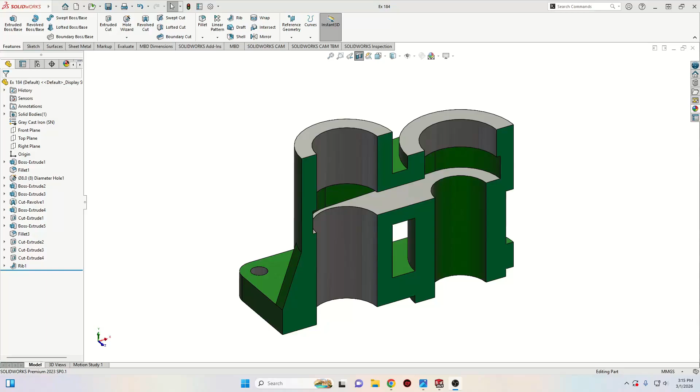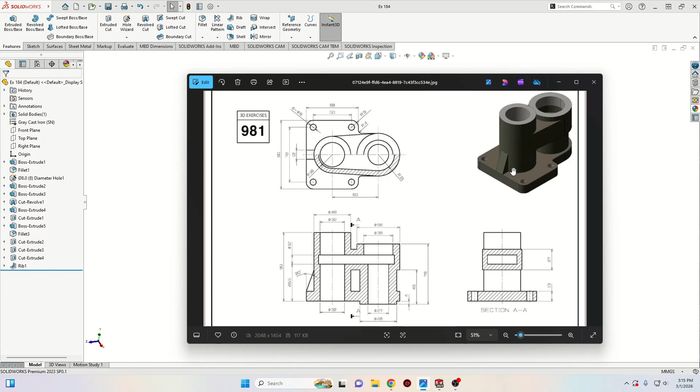This is how it's going to look at the end, and we'll be following the next drawing. We have here all the dimensions. We're gonna start with this base, then we're gonna make these two cylinders, and then the rest of the things. So let's go ahead and start this.

First, let's open a new SolidWorks document, select here part and press OK. Now let's make this plane white. Now we'll start with a sketch in the top plane.

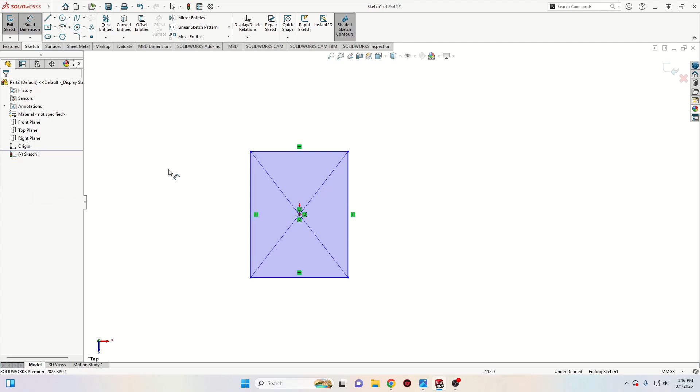And here we'll start with the center rectangle. Let's make it like this. Now let's give some dimensions with smart dimension. First, this line here will have 90 millimeters. And this one here will have 68.

Alright, now let's select center point arc and let's make one somewhere around here. Then select line and let's make a line like this, and then another one like this. Make these points tangent.

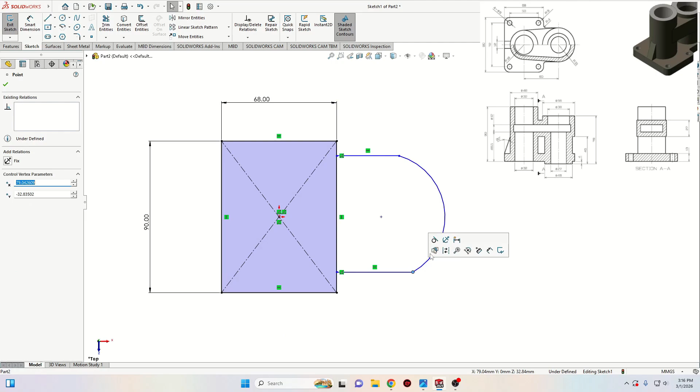Select this center point with this point and select here, make horizontal. Now with smart dimension, let's give a radius for this, and the radius will be 28. And now from this point to this one here will be 60. Alright, now this should be it.

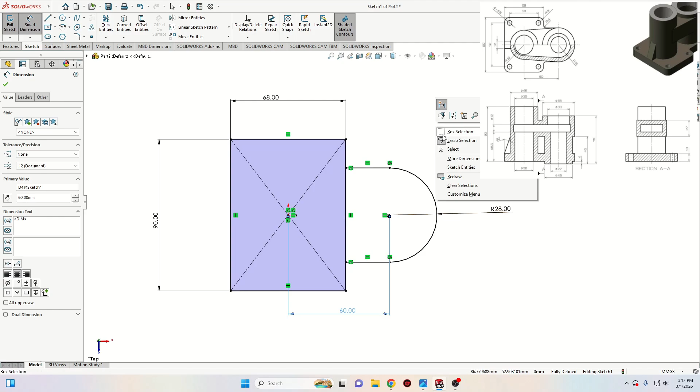Now go to features and use extruded boss base command. Here we'll select these two contours to extrude, and here we'll select blind. Now here the depth for this will be 13 millimeters. Press OK.

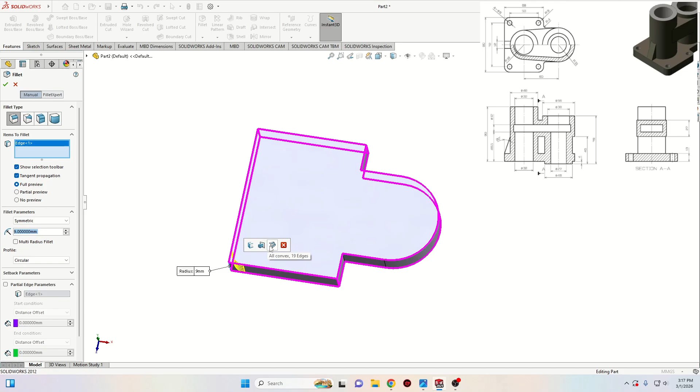And now let's select fillet. The radius will be 9 millimeters. Select this edge and then select these four edges, this other three. Alright, now let's press OK.

Now let's select fillet again. This time the radius will be 4 millimeters, and it will be this one with this one. Press OK.

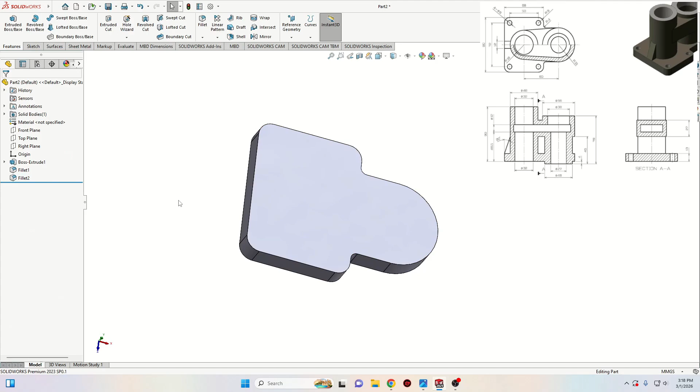Nice, and now let's select hole wizard. Select here hole. Here we're gonna keep this, and here drill size, the size will be 8 millimeters. End condition up to next.

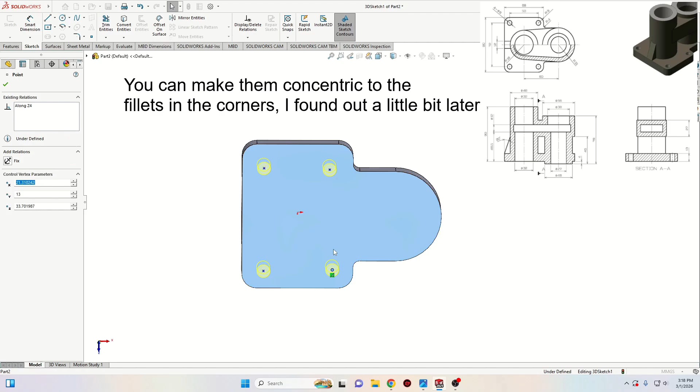And now go to positions, select 3D sketch, and let's place 4 of them. Now select these two and select here make along Z axis. Do the same for these two along Z axis. And then these two along X axis, and do the same for this other two.

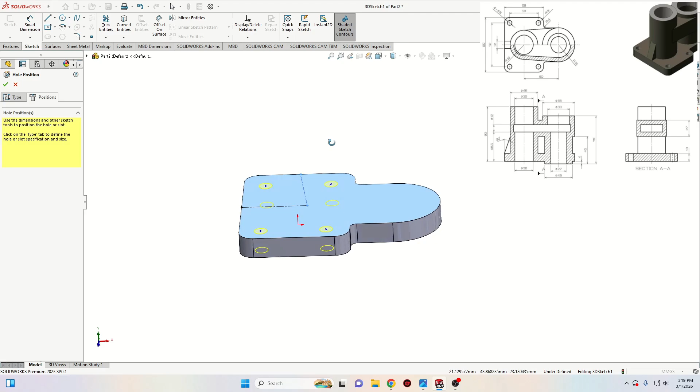Right, now let's select center line and let's make one center line starting from the middle of this edge, going like this on this face, and then going to the center of this other edge. Make sure that they are both these center lines on this face. Now select this point and select here make perpendicular. Alright, now these two center lines will help us to fully define these 4 holes.

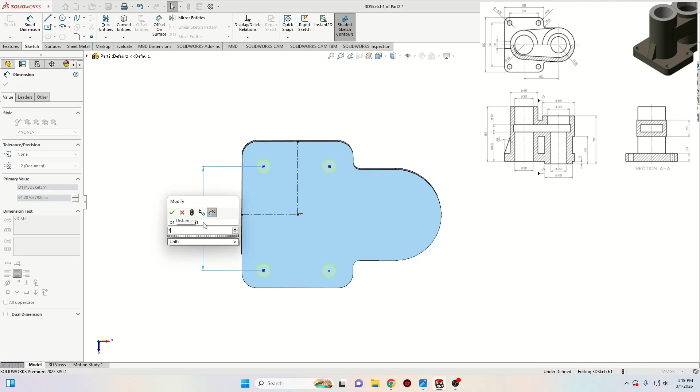Now select smart dimension and let's give some dimensions here. First, between these two will be 72 millimeters. And between these two will be 50. Now from this one to this center line.

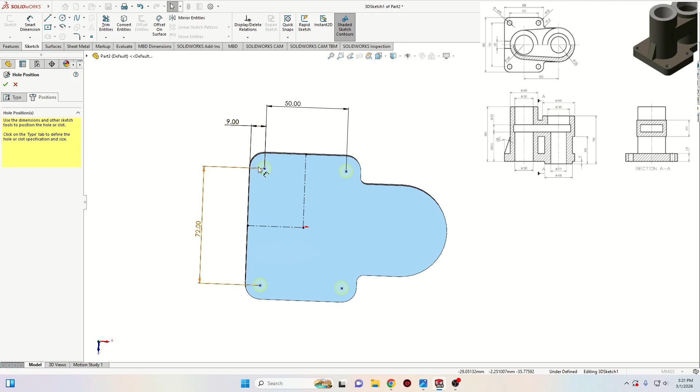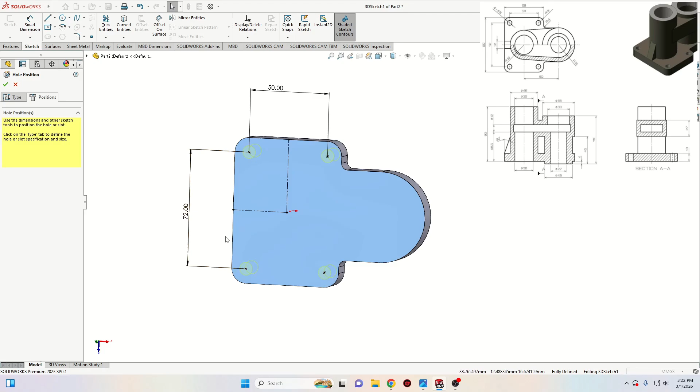concentric to this arc, and it will be way faster. And here should be 72, which will also be 9. Let's just select this and select here make concentric. Alright, and this is faster. Yeah, for some reason it didn't want to work with the center lines, and I didn't see that this is concentric. Anyway, let's go ahead and press here OK.

Now we have the holes. Alright, now let's make the first cylinder. To do that, first let's select this face and open a new sketch. Here select circle and let's make one like this. This one will have the diameter 48.

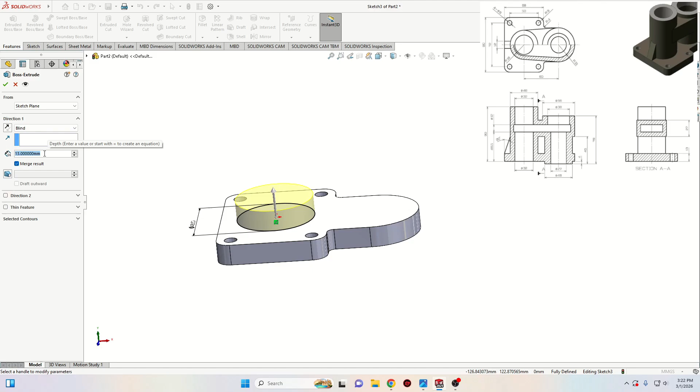Now go to features, use extruded boss base command. And here will be 77 millimeters. Press OK. And now select this face again.

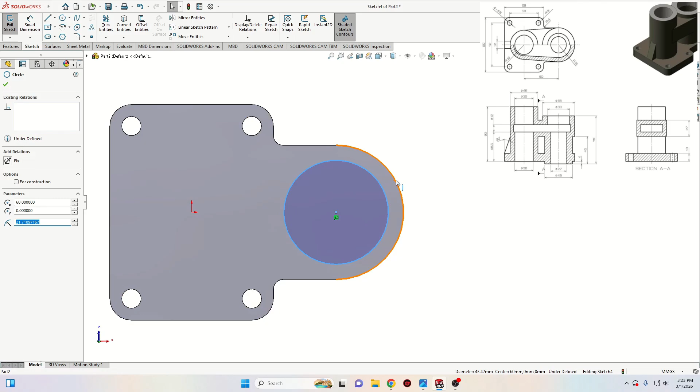Let's open a new sketch. Actually, let's select this other face. Alright, here let's make a new circle. Make it concentric to this arc, so make it in this center point. And then this circle, select the circle with the arc and select here make coradial.

Now go to features, use extruded boss base command. The first direction will have the depth 4 millimeters. And then for the second direction will be 75. Press OK.

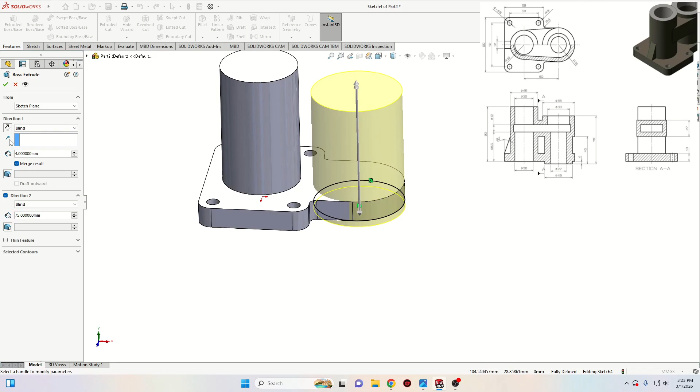Alright, now let's select front plane and let's open a sketch. Here let's select corner rectangle. Let's make one like this. And then another one like this.

Now select center line and let's make a vertical one. Now select these two lines and select here make collinear. Select this one with this one and select here make collinear. Now do the same for this one with this edge, make collinear. Alright, now actually let's do the same for this one too.

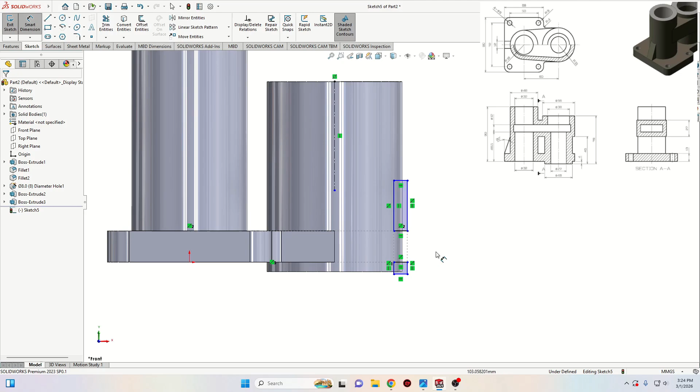Now with smart dimension, let's give some dimensions from this center line to this line here. Here the diameter will be 48. Now from this line to this edge here, actually to this edge, it will be 45.

Now let's make it here 6. And let's make it here 5. Now go to features and use revolved cut. This should be the preview, and now press OK.

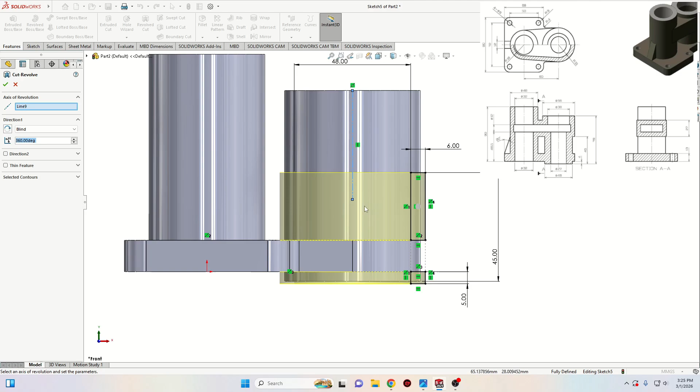Alright, now let's go ahead and open a sketch on this face. Select this face right here, open a sketch.

Now let's go to display style and select hidden lines visible from here. We need to see this edge here. Now select this edge with this one and select convert entities command, and now we have two circles into our sketch.

Now select line and make a line like this, then select line again and make another one like this. Now select this line with this circle and select make tangent. Here we already see that it's tangent.

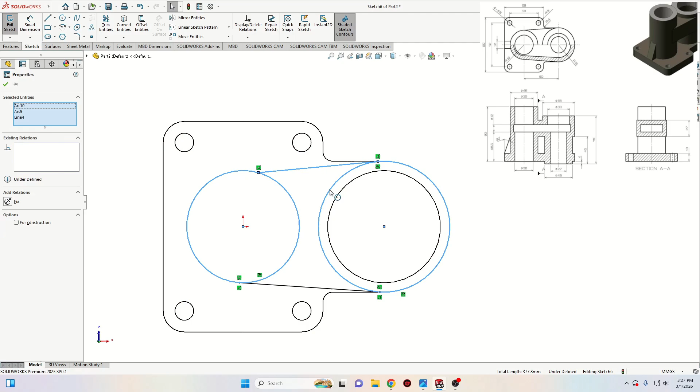Now do the same for this one, the line and the circle, make tangent. Do the same on this other side, make tangent. Alright, now with trim entities command, let's cut these extra parts of the circles. Press OK, and now we should have a sketch like this.

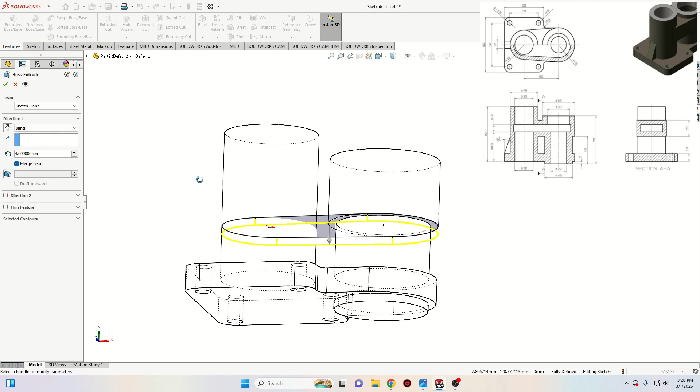Now go to features and use extruded boss base command. We can see that the extrusion is going down, but we want it to go up. Let's reverse the direction, and the depth for this will be 27 millimeters. Let's press OK.

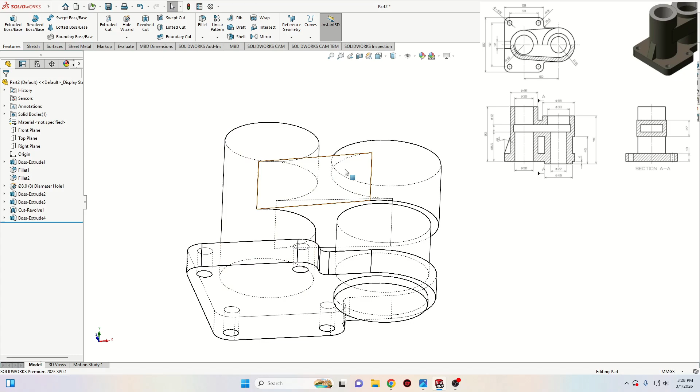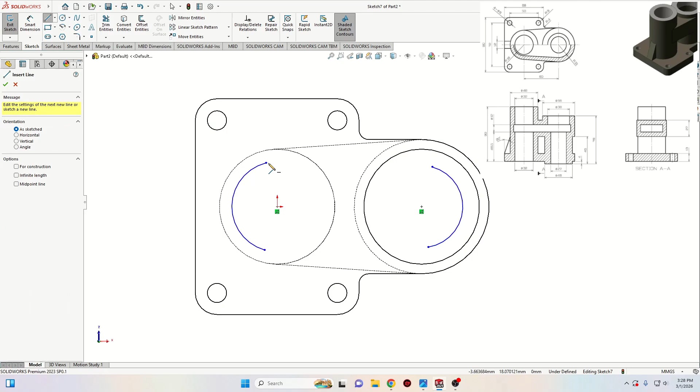Now we'll have to make a cut inside this last boss extruded that we just made. So we'll open a new sketch on this face. Let's select center point arc, and make one arc like this, then another one at this center point like this. Then select line and close this sketch just like this.

Now select this point, select make tangent, do the same for this one, and for these other two, make them all tangent. Now with smart dimension, let's give some radius to these arcs - this one will have 21 millimeters radius, and this one will have 18.

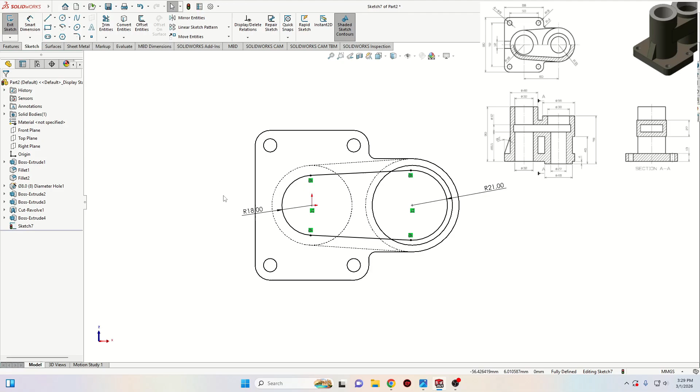Now let's go to features, use extruded cut, and we want this cut to be in the middle of the last boss extruded. To do that, instead of sketch plane, we'll select offset. The offset will be 7.5 millimeters.

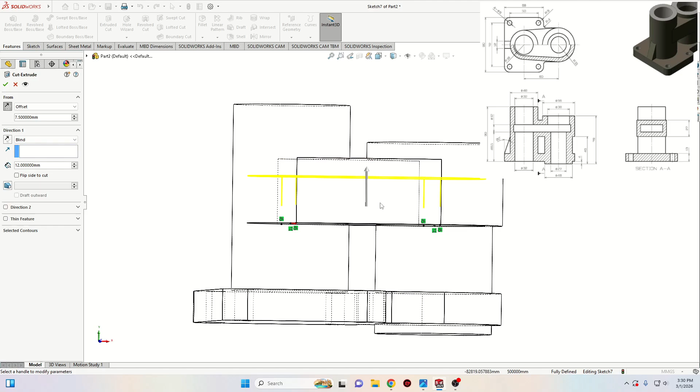Now we can see that the offset is going down, but we want it to go up, so we'll reverse the direction. Now it goes up. Select blind, and the depth for this cut will be 12 millimeters. We can see a preview here - the cut starts from here, goes until here. It's in the middle of this boss extruded. Now let's press OK.

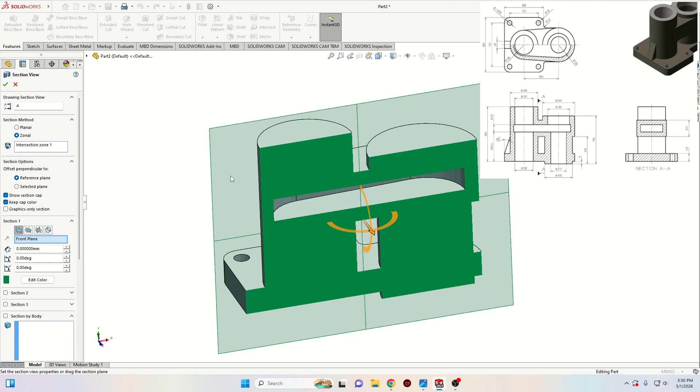Let's go back to display style and select shaded with edges. Now we cannot see the cut because it's inside here. If we want to see inside, we can go to section view, click on it, and adjust the planes to see inside. In our case, I select front plane because this is the one we needed. Press OK, and we can see the cut inside. Click again on it to close it.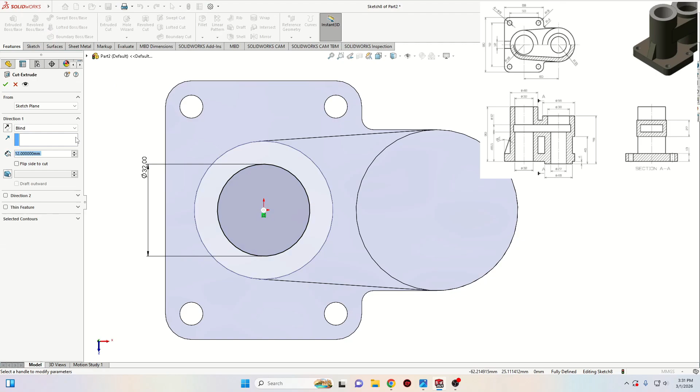Now select this face and open a new sketch here. Here we'll make a circle - select circle, this one will have diameter 32 millimeters. We'll go to features, use extruded cut, and instead of blind we'll select through all, press OK.

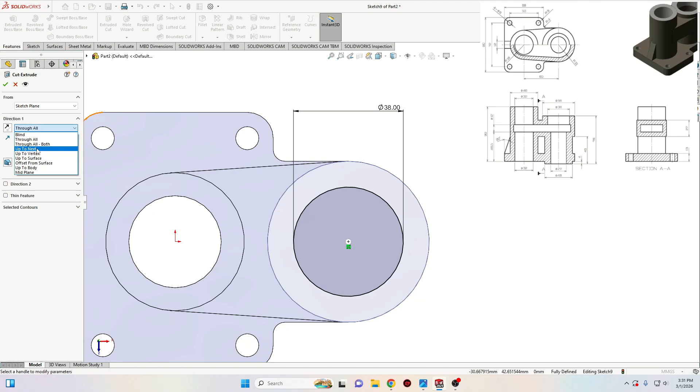Now select this face, open a new sketch, and make a new circle. Make sure that it's concentric with this edge. Now with smart dimension, let's give a dimension - the diameter will be 38. We'll do the same thing, go to features, extruded cut, but this time instead of through all, we'll select up to next, because this hole doesn't have the same diameter throughout this part.

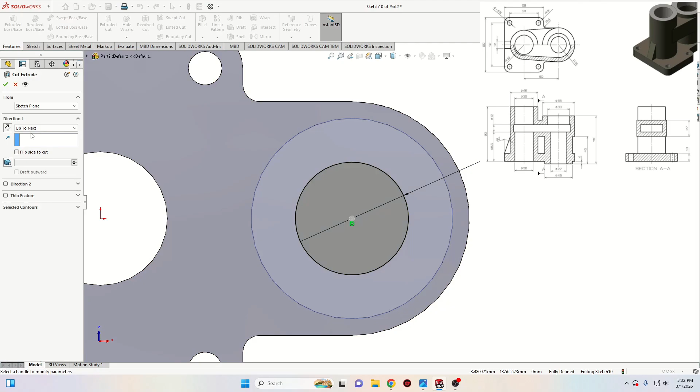Now let's open a new sketch on this face and make a new circle, concentric to this cylinder, with diameter 27. Now go to features again, extruded cut, and also up to next here. Press OK - or through all, this time it doesn't matter because the diameter for this hole is smaller than this one and it doesn't affect this part of the cylinder.

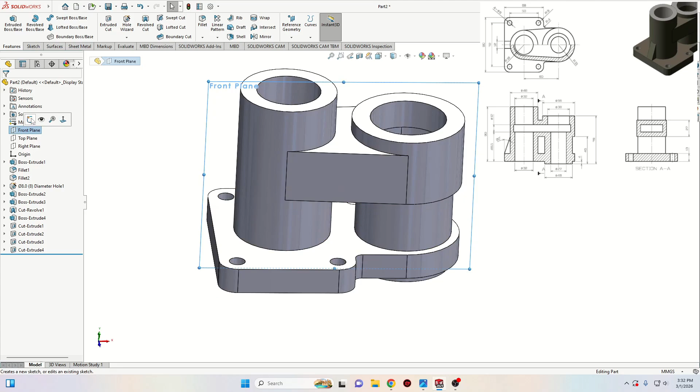Alright, now we'll have to do one more thing for this part, and that's a rib here. To do that, let's open a sketch in the front plane. Let's select line, make a line like this, then select center line, make a center line vertical, and with smart dimension give an angle between these two - here let's make it 20 degrees.

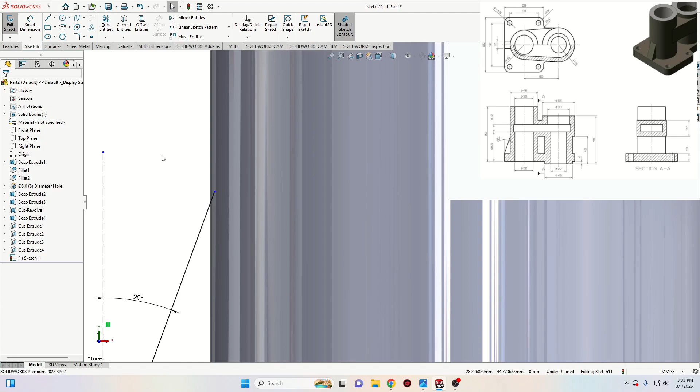Now let's make sure that this point is a little bit inside this cylinder, and let's also give a dimension here just to make sure that it's okay. Let's try with 1 millimeter. We also have to make sure it doesn't go too much inside to interfere with our cut here, but we're gonna see after we make the rib.

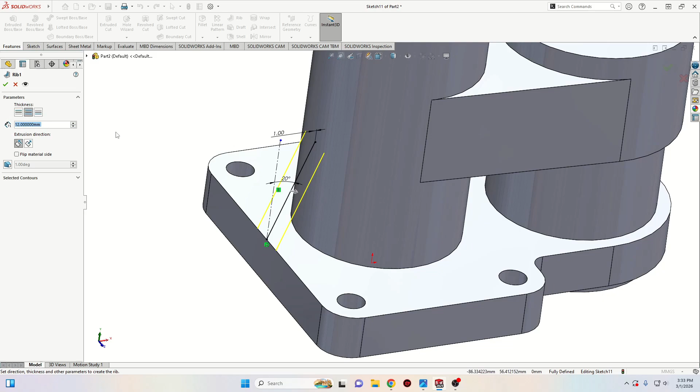Go to features, use rib command, and the dimension should be 12. Now press OK, and let's take a look inside. Everything looks good, so it's good.

Now we don't have any material assigned to this part on the drawing, so we're just gonna leave it like this. Let's take another look - it seems that we made all the things that we had to.